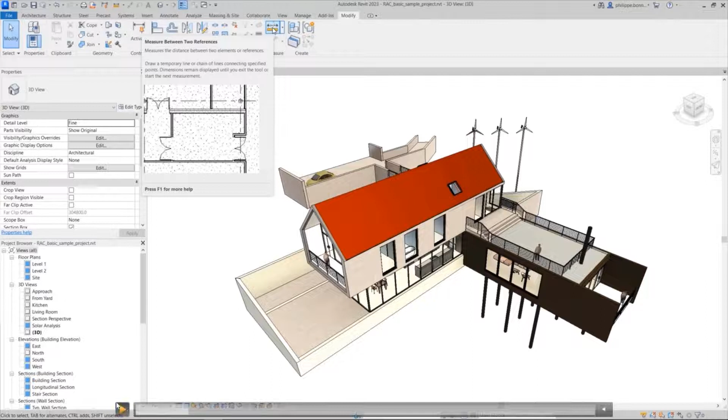All right, so the measure tool, as you guys know, up here in the ribbon. Again, it works in perspective or orthographic projections. And so as we start to zoom in here, you'll see that there's nothing special to do. You don't have to set work planes. You just hover over the canvas using your snaps. They are in metric. We're the last one of 3 countries in the world that still uses imperial. So the demos tonight are in metric.

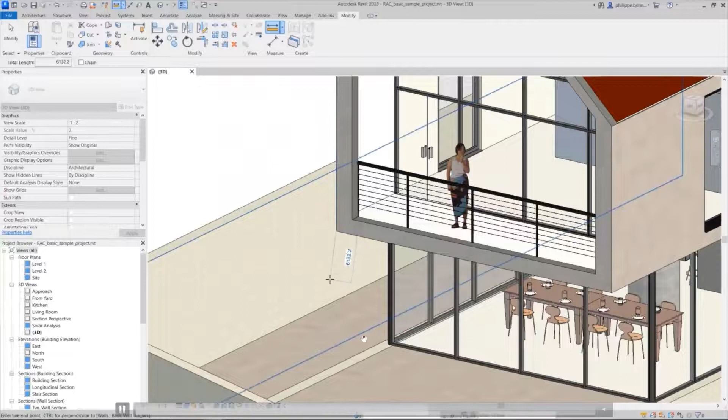And then he's going to hold that control key. So you can see how that's going to automatically snap perpendicular between these 2 walls and give you that. And then also notice as that measure stays there, you can pan, zoom, orbit around it to understand where that is. Now we're going to switch into a pure orthographic projection, just do another measurement, showing maybe that if you want to measure the overall height of this thing, he's going to do a snap override here by right-clicking, grab that perpendicular, which you could also do with control as well, but if you want to make sure it's snap perpendicular, you can do that.

Realize that also over here, the total length will show up in the options bar as well. So as you're doing these measurements, if the little blue text maybe isn't quite clear enough, you can always look up in the options bar and see that. Here they're demonstrating that chain command. So the checkbox for chain, they've done several measurements, and then you get the total chain length of those measurements.

Moving on, next tool is around work planes, and there's a new keyboard shortcut. By default, it's PK for selecting your work plane, so you can select those on the fly. They've also kind of re-engineered the set work plane box, where it's just a pick box now, rather than jumping out into another dialog box where you have to say, I want to pick a plane and go back into it. So it's really just a drop-down menu. You can set your work plane, or you can just say pick a plane. You can also use the PK directly from the keyboard shortcut as well. One more thing, and then we'll take a quick look at that.

So the other thing that's here is that if you have a family object that is a work plane based object, so whether it's a face based or a work plane based object, for instance, this little wine bottle that's sitting here on the table that comes out of the default family library. In the old versions of Revit, if I went and placed that on the table, then got out of that command and had set that to work plane face and went to some other command and came back and needed to place another one of those, it would be defaulted back to place on face, right?

It was always defaulting back. So now the setting actually remembers for that family what you picked last. If it was place on work plane, it will always stay on place on work plane and allow you to be much quicker about that. So let's take a quick look at these couple things as well.

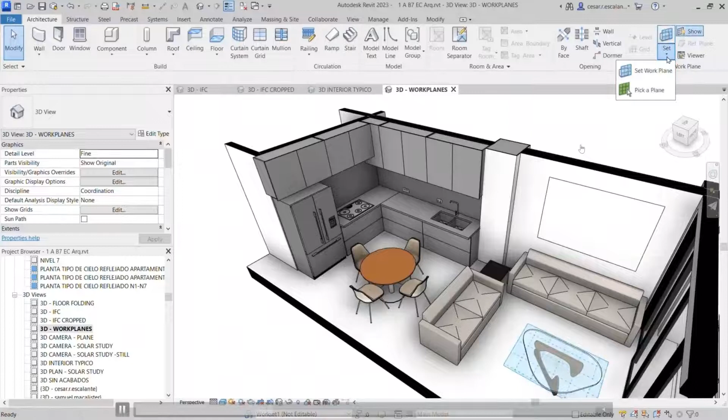So basically, you see that work plane, show work plane is on that tabletop. There's that family for the bottle of wine. There's your new dialog, or not even dialog box, but your quick pick for that, where you can just go set work plane, use that keyboard shortcut PK, which you can also modify. If you don't like PK, you can make it whatever you like. But if you look down at your keyboard right now, they're actually really close together, so it's pretty cool. You can do that on the fly during a command.

So what they're showing here is that the show command is turned on as well. And then CAD file positioning is part of this tool as well. So the ability now, as you're placing CAD files, you can actually pick a plane or a named reference system that those things are sitting on when you actually link them in. So we're going to go in here. In this case, we're going to grab a 3DM file from Rhino, and then you get the place at level drop-down list. Again, this works for DWG, Rhino files, OBJ files, really everything else, and you can actually tell what plane that object is going to be associated with.

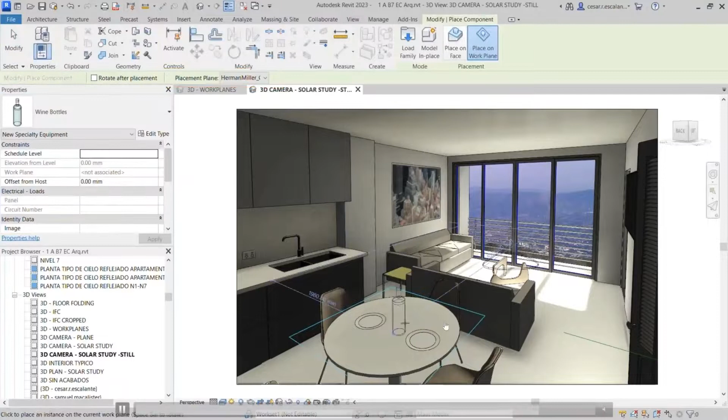This last part of this video is where it actually shows that if you place it once, it's actually saving that setting for you, so you're not having to go always back to the ribbon and double check where your work plane is being adjusted to. You see over here in the options bar, placement plane is actually right now on this Herman Miller table. Next time you go back there, it'll be defaulted back to that exact same work plane without you having to reset it all over again.

Okay, all right, moving on. Well, thought I was moving on. There we go.

This is actually a really big one. I know a lot of you guys work with materials. I think probably the majority of the people on the call, I don't see the list in front of me right now, but maybe a quick poll of the audience, or maybe Jay or Shobit, if you guys know, majority of people probably more architectural focused on the call tonight, or we have some engineering types as well? We got both. We got a decent mix. All right, good. Well, for the engineer types that don't render, skip this one, go do something for a second while we talk about materials. Even for the structural and other folks, materials are actually quite important. So please don't skip over. Nope. All right, we won't skip over it.

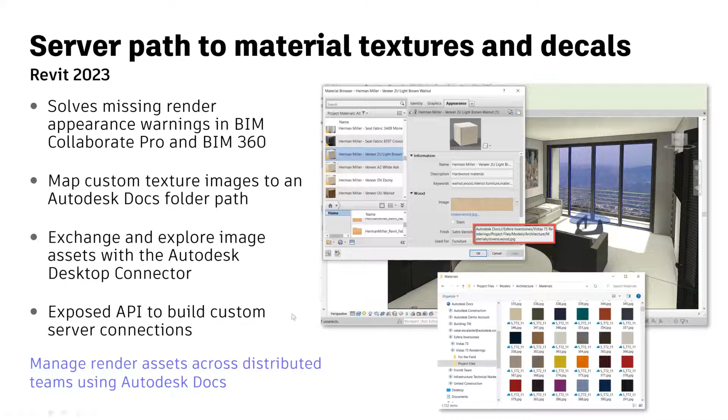So you can actually expose server connections. So if you'd rather have your images, your files on, let's just say Dropbox or some other external to Autodesk solution, you can do that as well now through the API. So it's really going to help you guys when you're doing those renderings through the cloud, that if a material is made and that texture, that JPEG is shared in that cloud site, anybody else that hits render is going to get the exact same results because they're going to be assured that they're using the same materiality for that texture. And I pretty much just said all of that, so I'm going to skip the video in this particular case.

There's a question in the chat real quick, something about being problematic. Can the asset duplicates be removed? Will this make the file size really large over time? Yeah, I kind of answered it a little bit. It's just a new functionality. If you really think that the material assets are bloating the file, there's some other major technological issues going on, because those material assets, even if we duplicated 100 materials, it's not that big of a strain. No, not at all, Jay. I totally agree with you. The JPEGs themselves are actually pretty tiny.

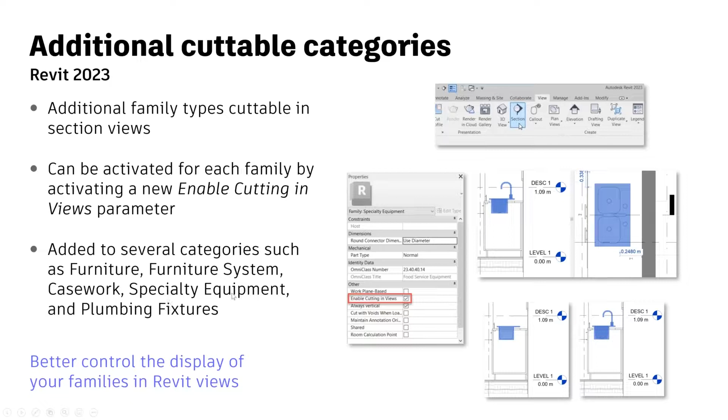Now you can actually go into the family itself, go into the properties and say enable cutting in views. Right here is a little checkbox. So you can check that box off, and then every time you have this particular family cut in a view, it'll actually show that way. And again, it applies to specialty equipment, plumbing fixtures, furniture, and furniture systems. So I think a welcome addition there as well.

There's another video, again, guys, just for time's sake tonight and the fact that the audio is not working well, if I feel like I've explained it pretty well, I'm going to go ahead and skip over the video.

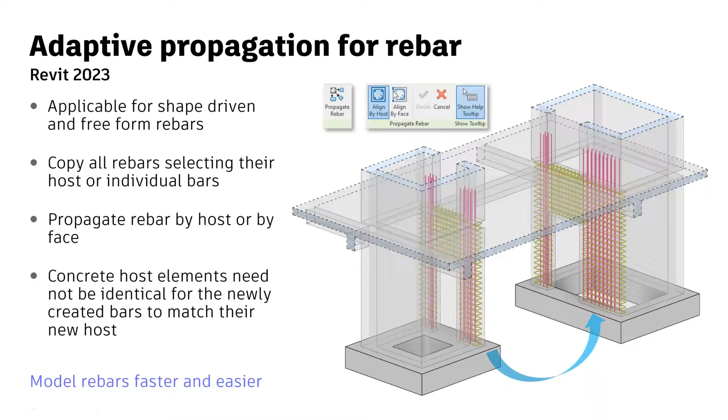It's basically shape driven, or propagation driven rebar, meaning I would create a rebar set for a particular wall. In this case it's got a couple of columns and a header, a door opening down here, and an opening above. Now if I want that similar rebar in another similar wall, it doesn't even have to be the same - maybe one side is a little wider, or the header is a little different above the door. The rebar will actually propagate over, use some intelligence and figure it out. It basically duplicates it over and adds the necessary bars it needs to make it work out.

Now there's a video for this. I'm not as good at the structural side of things, but let me try to voice over this. You can see here that you can simply pick a set of rebar that's already been detailed out, then say I want to pick propagate rebar, pick on all the other columns, and bam - they all basically have all the rebar installed inside of them.

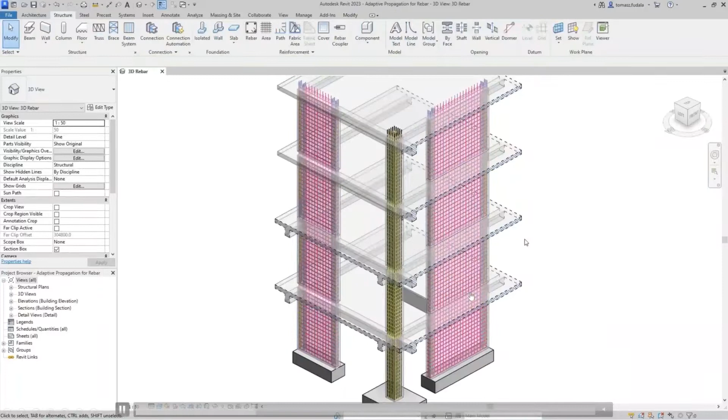They were doing single picks there. They also did a window select and grabbed all of the columns of that type in the model at once. Now they're doing it for walls, and you can see just how quickly a rebar detailer might be able to go in and do 3D versions of rebar in a model like this.

Here's an example where it's a little different - we're going to align that to the host. You can see the doorways and walls are actually a bit different here, but again it figured it out. It expanded out the additional rebar it needed to fill in that space, depending on the set of rules helping define that rebar assembly.

We're also able to do it for just select pieces of rebar - it doesn't have to be the full cage. Right now they're just grabbing some of the outside, looks like rings of that.

Here's maybe an architectural example - if an architect wants a little bit of detailing going on, a concrete stair, adding some rebar to that concrete stair, being able to grab a shape and quickly propagate it up and down the set of stairs. It doesn't have to be another column or another wall - that one showed just in the same stairway.

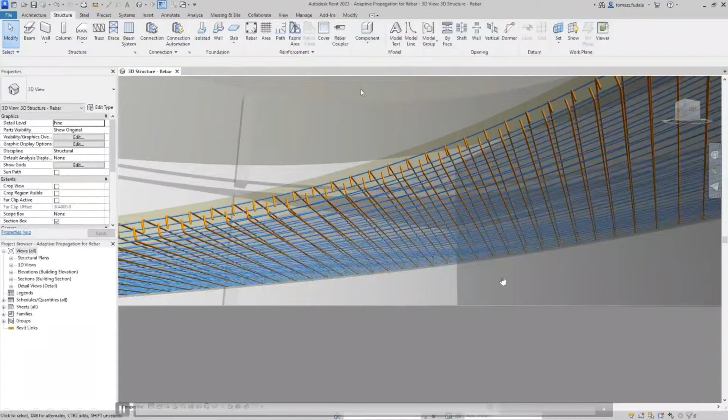And it's not just orthogonal stuff. Here's an example propagating rebar in a parking garage ramp, which is curved and twisted at the same time. We grab that set, then pick on the top parking ramp above, and it takes that exact same rebar layout and propagates it up to the top set as well.

Pick there, select that destination host, and bam - all your rebar is done.

Right here, and at the right side, it looks like. Yeah, I don't know, I'm not sure who did this one or if that's just how it extends. It looks like there's a little shadow of some additional concrete over here. I don't know, Jay, it might - I'm not sure exactly what happened right here in this corner.

But let's get back to Revit itself. Revit just had its 20th anniversary as an Autodesk product. So for those that don't know, Revit itself is about 22 years old. But on April 1st, yes, April Fool's Day, 2002, Autodesk finalized the acquisition of Revit Technology Corporation for $133 million, which in today's dollars probably sounds like a bargain.

And the irony of Revit coming out on April 1st, I think, was intentional. Just saying. Probably, because remember, a lot of us thought, like, no way, it's got to be an April Fool's joke. It can't really be happening.

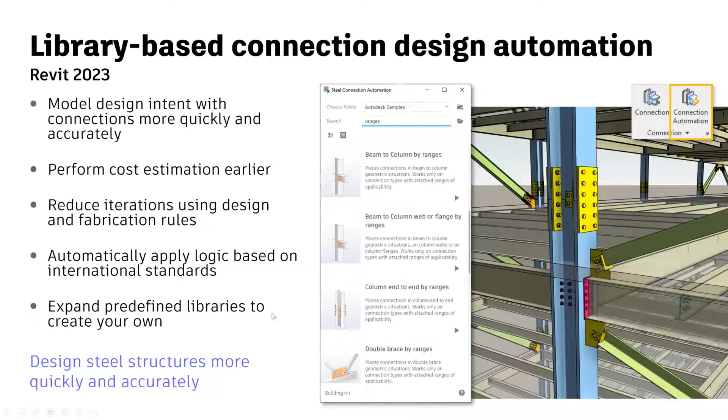You've got some angle connections over here, and a spot where a steel joist is intersecting this column. And there's some of our nuts and bolts. I can't zoom in because it's a PowerPoint slide, but I'm really hoping those threads aren't modeled on those bolts as well, but probably not. There's a video to this, so let's go take a look and see what they had to show.

Pretty cool looking structural steel model. We're gonna eventually, as we pan over the model here, get into where this library component is. I believe they were talking a little bit about the analytical properties of doing this kind of detailing as well, showing some of those analytical stress diagrams right over the Revit model.

So here we go, connection. What was that, Jay? Oh, sorry. No, I'll let the video finish. Okay, I just paused. Go ahead. Well, what was the last thing you just mentioned? Damn it.

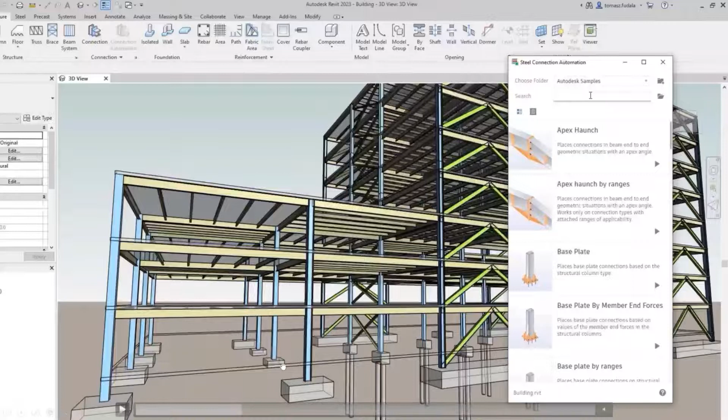The structural analytical properties showing the diagrams, the stress diagrams. I'm guessing you're going to go in a little bit to the analytics for structural. Yes, absolutely. There's big changes for the whole way the analytical models are dealt with in Revit. They rewrote analytical models entirely for structural steel. I shouldn't say steel, for structures in general. All right, let's go on.

So we've launched the, let me go back a little bit. Jay screwed me up. Nothing new. Hang on just a second here. Trying to get back to the actual button.

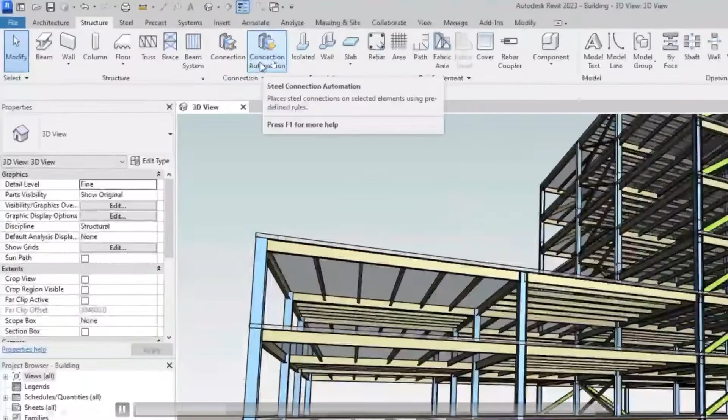Where was it? Okay, you'll see up here at the top when it plays, right here, connection automation, steel connection automation tool. That's going to bring up that player, give you the available kind of types. You can search for those different available types. They're looking for a specific set of ranges, there's a bunch of rules. This is really Dynamo running in the background, so there's a whole bunch of rules that you can define and apply. Then it walks you through this list of any kind of player, and it's going to allow you then to run that. And once it runs, there was a bunch of new steel connections that were automatically applied to all of these different things. So we've got some base plates, anchor bolts, and there was some steel construction or steel details happening up here at the end of these joists as well.

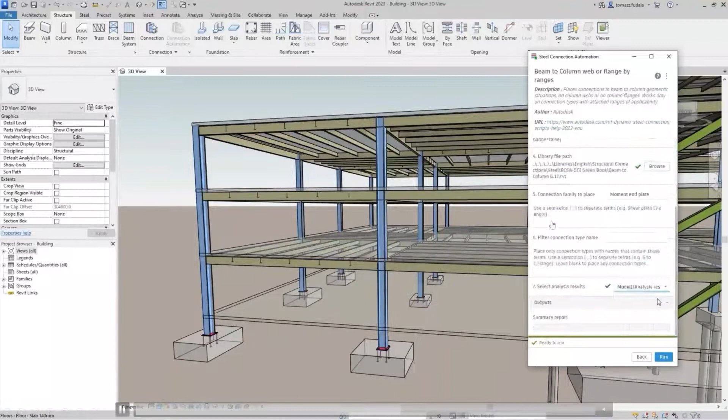Windowing large sections, applying those rules, flipping some of these things from true to false so we can basically define where these connections need to go. Right here on these columns, you might have seen those connection details snap in really quickly. The structural models look really cool to me, the way they get color coded here with the connection details, the steel being different colors to really set it apart. Windowing an entire building, all the steel, let's go apply all this at once.

How customizable are the base plate and connection families themselves? In the video, the narrator talks about these being fully customizable. They come out of the box with an entire set that is kind of industry standard. I'm not a structural engineer, so I don't know if that standard was completely US based or if some international standard was applied. But it does say these are basically a base case that can all be modified to suit your own needs. Hopefully that means very customizable, but I'd love for one of the structural people on the call to jump in and let us know really how customizable they are.

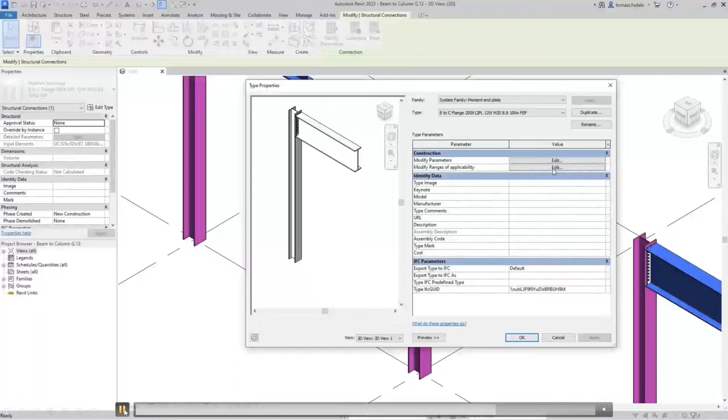Talking about the library itself, here's a bunch of the parameters you can actually go in and change. Ranges of applicability, that's tough to say, but you can change all of these things. You can change all the shape parameter definitions, end forces. There's a bunch of stuff that looks customizable in this as well.

And obviously just doing a quick little fly through. Let's move on, you guys get the point on that one.

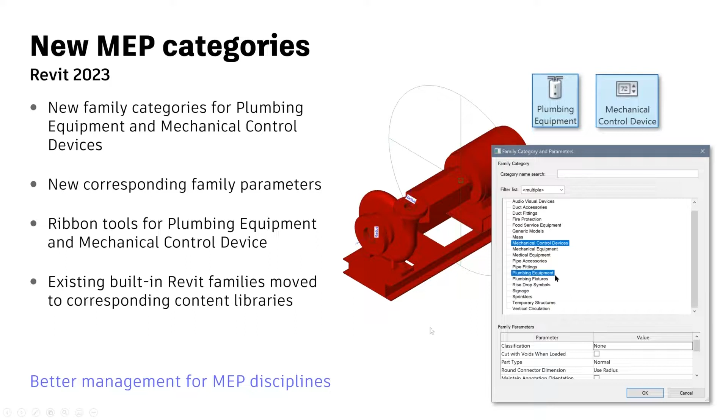MEP stuff, there's a bunch of new MEP stuff this year as well. There's a couple new MEP categories: plumbing equipment is now a category, and mechanical control devices is a category. What does that do? It gives us visibility graphics over those things, gives them their own category, allows us to add them to view filters and view templates, and define them better so they're not just all specialty equipment or generic models anymore. There's a new corresponding family of parameters that goes along with these, ribbon tools for all of these as well, and existing built-in Revit families have been moved to the correct library. So if it's a pump, it's now in plumbing equipment, etc.

Moving on, a tool for everybody. It's an architectural example being shown on screen, but in the past, 22 and earlier, if you had a shared nested family, for instance a table, which is really two families in one, a table family with a chair nested into it and arrayed around the table, and if you selected it in Canvas in a project, the temporary dimensions did not pick up. You could go up to the options bar and say activate dimensions, and sometimes they showed, sometimes they didn't. We basically did away with that, removing activate dimensions from the options bar. Now when you have a shared nested family and pick on it in Canvas, the dimensions are going to pop up, so you can move that nested family, the table and chair, around in its entirety as a group.

Room performance, right? Rooms are one of those things that can degrade performance, because a lot of you guys have giant projects like what's being shown here, maybe hospitality, maybe dorms, something like that, tons and tons of rooms. Those rooms are analytical in property, they can define not only space but also volume. So in this new release we've skipped the regeneration and calculation for redundant rooms, and that helps when you reload and unload links, making it about 20% faster. You're going to see noticeable improvement where you have area and volume computations enabled for your rooms. Again, one of those little features that's all around performance of Revit.

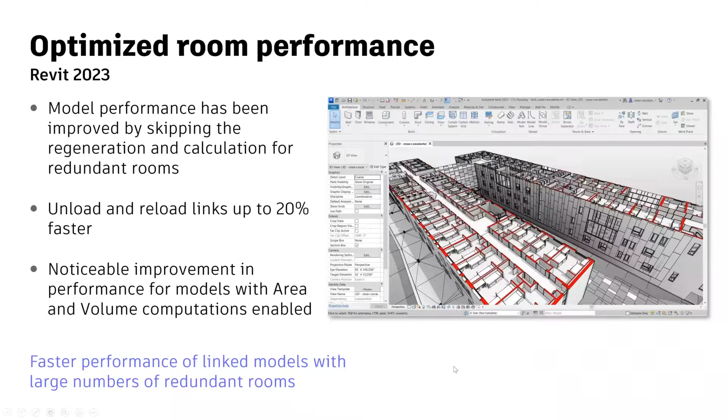Hey Scott, does that mean we can now run wild with calculating volumes? I don't know, I don't have enough experience. Run wild, I don't know, Jay, try it, let's see what you come up with. Yeah, I mean they say the performance is a 20% improvement, so I think that's going to be up to you guys. You're going to have to go in and turn area and volume calculations on in a large selection of rooms and see what it's doing for your performance. I'm not sure if I can actually put a metric or a number on that one.

Has anybody ever been in a situation like this where you need to window select an entire model that's been work shared, and you get 50 million borrowing icons for work shared elements? Or you select a gigantic curtain wall and all of the pins, because all the curtain wall panels are pinned, popped up, and then you can't actually get to the geometry that you need.

So now in the worksets dialog box, the one that pops up from the bottom of the screen, there's a new checkbox that says show work sharing, make editable controls or not. If it's checked, it's going to show these things. If unchecked, it won't show them any longer. It doesn't mean you can't just select the item, right click and say make editable, or there's other means of making something editable rather than clicking on one of these little icons.

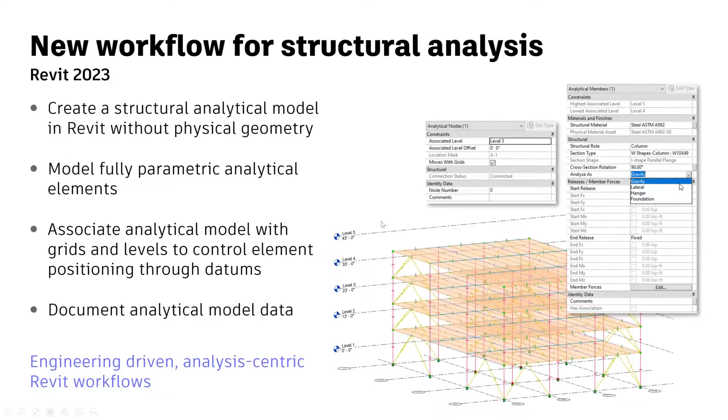One more slide after this one, and then a quick video that I'll try to do a voiceover for. There's some new tools. There's an analytical member and panel you'll see in the ribbon. You can use existing physical geometry as context to snap to, and we'll show that in this video. Control changes independently, so you can take the analytical and move it around, like in this V-shaped concrete footing system. If you didn't want that analytical line there, you could move it wherever you needed. So a lot more flexibility on the structural side.

This is kind of cool too: create multiple analytical models for a single physical representation. Maybe you're testing some things out. You want to run one simulation with a diagram that looks like this, leave the physical geometry in place, and create another diagram for a quick test run, because maybe it's more efficient to analyze it that way, or to have it constructed that way instead.

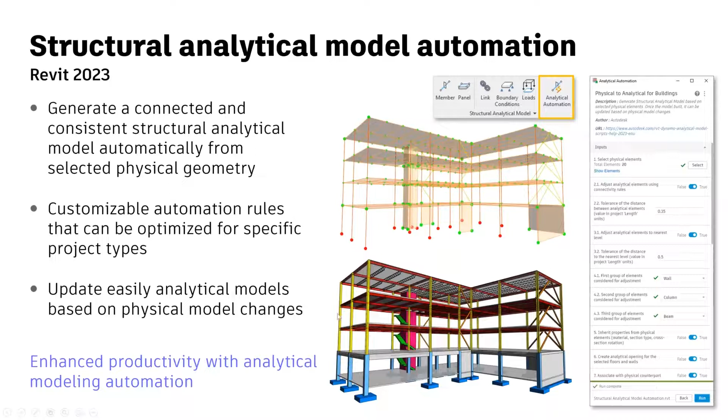Okay, let's take a look at this, and I'll do my best as an architect to talk some structural to you guys. Let's get rid of the volume. All right, here's again some of those analytical models showing some of the stress diagrams. And in a second, they're going to get into this new decoupled analytical model.

So they're going to take physical context. They're going to take structural members that are already there. This is just kind of a quick show of the analytical model compared to the geometry itself. It's not just for orthogonal stuff. It can be for complex arched trusses like this.

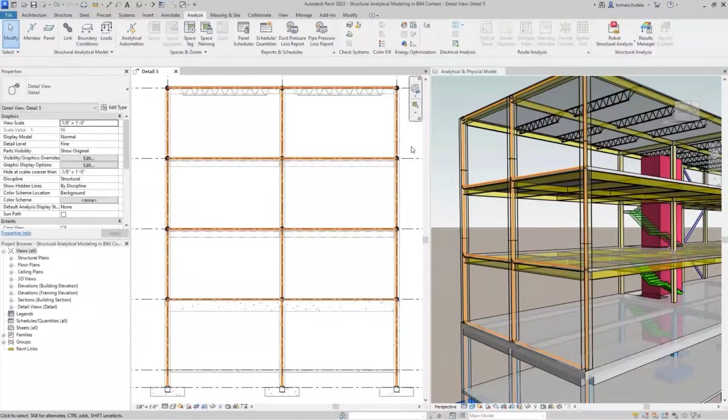Here's the case where we're going to look at a couple of columns. We're going to go in and grab a new tool for start and endpoint definition of this particular analytical system. Connect those dots, and you can see both in 2D, the elevation or the section there, and in 3D all at the same time. It's snapping that geometry to that physical geometry.

Now in this case, here's that kind of different concrete condition for the way that this footer is set up. You'll see that we can turn on 3D snapping, define some parameters over here, define the actual type of section that we're defining this analytical model for. And now you can see that it snaps from the bottom of those round columns to the very bottom of that V, but it doesn't perfectly align with the V itself, because that's how the analytical system would be defined for this particular model.

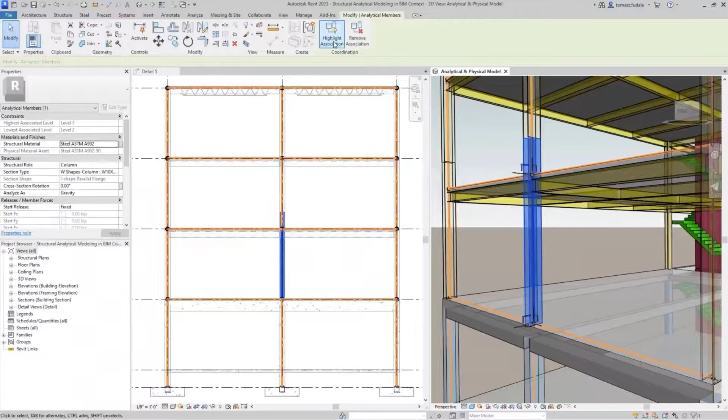And this is just showing you some of the results out of Robot Structural Analysis and a results manager when you get those quote unquote rainbow diagrams out of that as well. And then you can take these things and you can adjust them. So highlight the association between them. Once you make an association between an analytical model and a physical piece of geometry, you can see them tied together at the same time.

And this is some of the automation that says, I want to just go ahead and select a bunch of stuff. I have a model that's complete with all of my steel already that has no analytical model. Run that player script, change some parameters for some different tolerances and things here. Give it some different outputs. Let's see, we got to switch that. Those are walls, columns, beams, it looks like. We're just going over the different properties that are available in this tool.

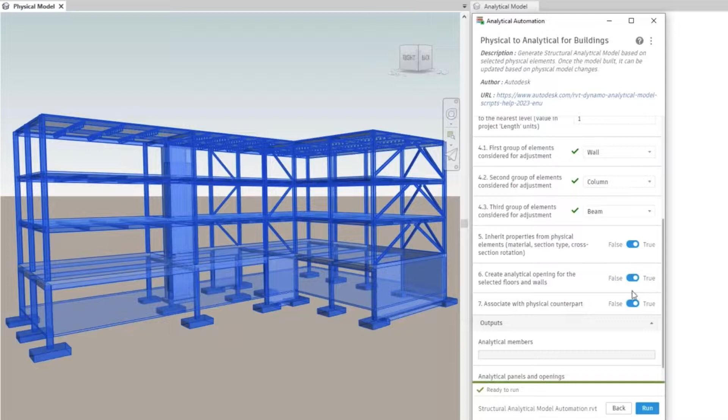And when you're ready, you hit run, and it will apply an analytical model automatically to all those. So you don't have to think about, oh man, I have to do all of this by hand, stick by stick by stick. Nope. You can use these players to get this done very quickly in a very automated fashion. Hit the run button, and in seconds, you're going to end up having the complete stick analytical model of that structural steel model from the left-hand side.

All right. Ooh, this is a long video. What else are they talking about here? Let's see if I can remember from what I learned when I watched these videos before.

Looking at a particular shape up here at the top, I think we're going to make some adjustments to the structural system itself. Highlight that association again so you can tell where the analytical model and the physical model are tied together.

This is that ability to really construct an analytical model entirely on its own without any physical geometry at all. So you can see that we're just in this analytical tool, just drawing the diagrams, so to speak. Structural engineers, am I saying that right? Just drawing the diagrams. There's our floor as a diagram. There's our analytical model. No steel whatsoever, no concrete, strictly analytical.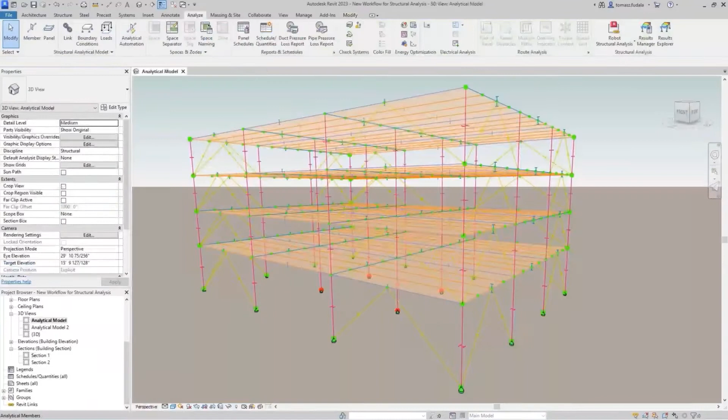We can actually go analyze that now in something like Robot. Make sure it applies first, then go back and add our geometry to it later once it meets the calculations that we need it to. And you saw that it obviously is parametric and adjusts where it needs to, just like you expect anything in Revit. Doesn't apply just to steel and concrete in normal patterns.

Here's an example of actually doing some analytics for a concrete stair, a much more complex catenary curved arch cable stay, or that truss diagram that we saw a little bit earlier in this video.

All right. Yeah, Jay says the Tekla-ing of Revit. Yeah, I think that's probably a good way to describe it. We'd be foolish to think that Autodesk doesn't look at our competition and see what they're doing right and what they're doing wrong, and try to bring some of those things to our own software as well. So hopefully the structural engineers are happy with that.

What do you guys think? Anybody have any reaction from the structural side? Somebody says, yeah, I can't wait. I think that was in reaction to that.

Sal, can you unmute if you're here?

No? All right. Well, it's all right. We'll move on. If they want to speak up later, perfect. I don't know. All right.

I'm doing some structural projects. I'm pretty gassed about it. Yeah, so look, Jay, what do you think? Because I'm not structural, so what do you think? Does it look pretty cool? Well, I think. Oh, there we go. Now I can unmute. There you go. In my experience, yeah, it's at least a time where engineers can start really using Revit for some sort of analysis, where in the past, my experience was it was a joke.

What do you say, Sal? Yeah. For the longest, our engineers have avoided any type of analytical portion of Revit just because of the functionality. But this seems to be promising. I'll definitely be pitching it to our engineers so that they can start probably benefiting from it. Awesome. Glad to hear it looks promising for sure. Yeah, eager to see you guys dive into this, and then maybe at a future LARUG, maybe you guys could pop in and tell us what you think of some of the new structural stuff.

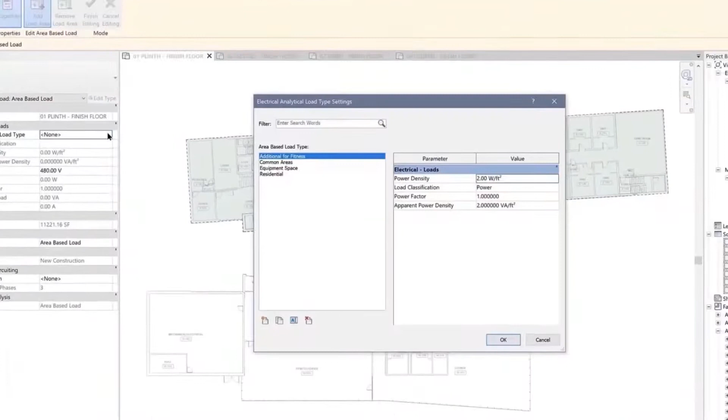Then they're going to look at that thing as an entire area, and then they're going to realize that, no, we need to break that up into a couple different load areas. So they're going to go in and say that this is a dormitory building, so this is a residential style load analysis. And then we're going to, in a moment here, grab some new sketch lines. So we're going to edit that load again. And you notice they're just going to draw these lines completely across the model. And that's just going to divide this thing now into 3 different zones.

So you've got the kind of living space of the dorm buildings. You can see there in the middle. You've got the stair towers and the bathrooms and stuff like that at the ends. So now when they go and pick on these, now we've got 3 different load areas. And so there's our residential. And they'll probably change this. This is now just common area there on the end.

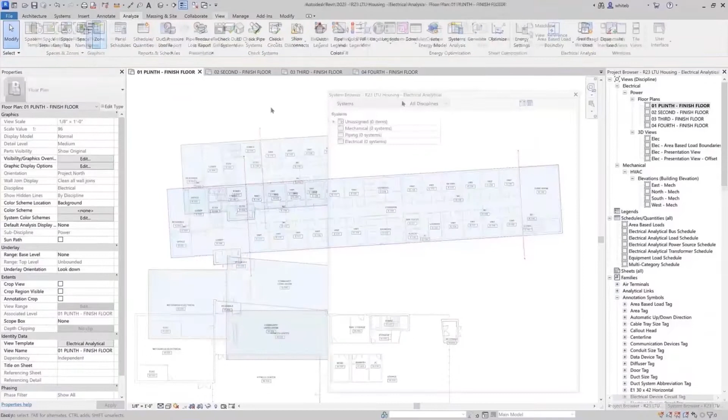And I don't know what they do on the other end, but maybe they leave that one alone for now. Then we can go into the electrical system browser, start talking about the power generation system, what's going to be used. You get to pick from your list. This is all stuff that you guys are used to already when you pick from these lists.

And then it starts giving you these area-based loads based on that sketch that you provided. So the idea is that it's very conceptual, allows you guys to get a much better sense of what this building is going to need as far as electrical loads, again, without having to place a single component inside of Revit. All right, anybody electrical want to unmute and tell us what you think?

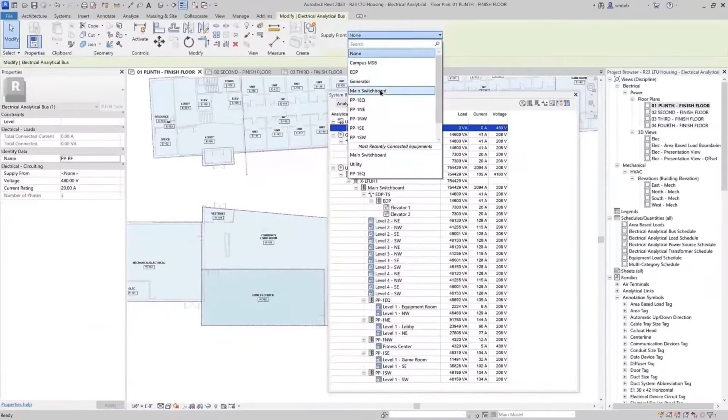No, all right. We'll move on.

Okay, something again, probably more for architects, but maybe there's some solar studies going on the MEP side if you guys are responsible for looking at any kind of lighting analysis, things like that. Solar studies have been in Revit for quite some time, but they were a little bit tougher to find as far as a UI goes.

You went down to the view control bar at the bottom, you went into solar study, there were some settings you could change there that we're going to look at, like changing it from a still image to a single day to a multi-day. These are all controls that were there, but they were kind of spread out through the UI. So what's happened now in Revit 2023 is they've redesigned this entire solar study contextual tab, and it appears in the ribbon when you activate that solar study.

So now you have all of these controls in one spot at your fingertips, and you can change these things on the fly. So obviously we can step forward or backward through the different frames. When you're rendering shadow animations, there's individual frames that get generated, and I can skip forward frame by frame, or I can go keyframe, which is 10 frames at a time. We can change the speed of how all of these things play.

You can play them, play a preview which plays through one time. I can play the shadow studies in a loop. I'll show you that in a video here in just a second. I can change the sunlight intensity, the shadow intensity on the fly. And I can even switch the study type on the fly. So I'm in a still and I want to go to a multi-day and I want to pick the date and time. I can do all of that right from within this one ribbon context.

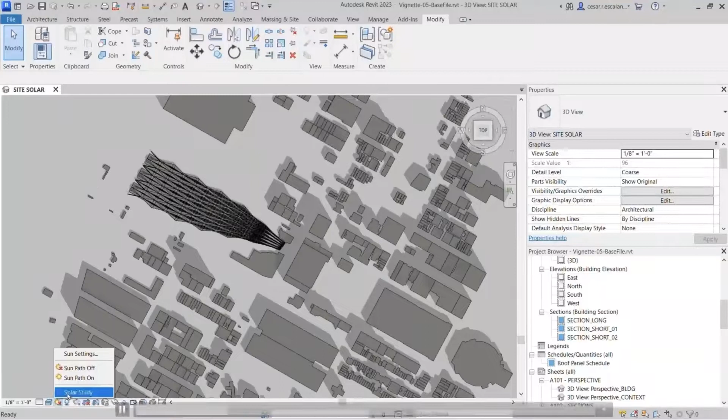So with that, here it is being demonstrated. So jump into that model. There it is, fully rendered out. Nice little guitar in the corner. So just being able to grab shadows and adjust date and time right here in canvas, right? Solar study is in the same spot, but that activates this new ribbon up here. You'll see a solar study tab up here.

And this is where we can then take those shadows and start going through by individual frames. We can go previous, we can skip through keyframes, which again jumps 10 frames at a time. We can play a single preview, we can play it in a loop where it'll just repeat continuously over and over again, as I explained. Again, adjust the speed, sunlight intensity, shadow intensity. You want those shadows a little bit darker, we can darken those up.

It's a little hard to see, but you can see the colors changing down here. It's all kind of gray in this diagram. They should have used more color. Here's one that's got a little bit more geometry to it. They're going to change from a still image here to a single day and play that, so you can kind of see some of those complex shadows moving over the space.

Maybe we want to change it into a fall time solar study, or we want to go in and do a preset and change that azimuth and things there. Again, just adjusting the date and time. Just far easier, in my opinion, to get these things looking the way you want to, or being able to understand what a full animation sequence might look like by being able to analyze those shadows in a much easier way than you could in the past.

All right, let's pause for a second. We're moving on to the next topic. And just to give you guys an idea, I think I'm about an hour in of talking. I'm on slide 49 of 111.

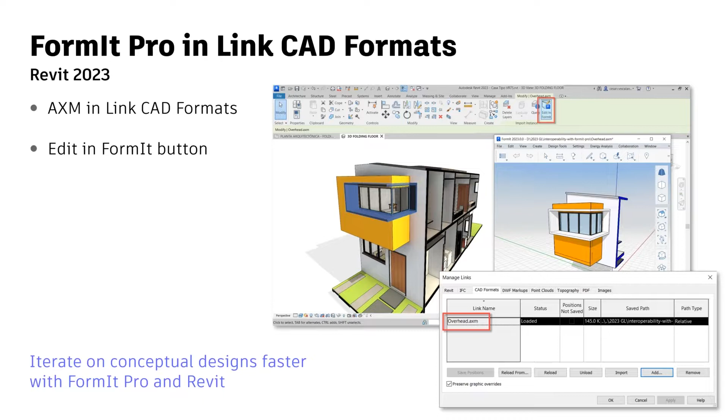So you have to think about that before you start sending stuff over. The next part of this is that when you get into Formit, you'll see that geometry, and another member of the team can then go edit that Formit geometry, basically draw over the top of it, use all of Formit's massing tools, so to speak.

Boolean operations, unioning things together, making subtractions of parts - way easier to do here inside of Formit than it would be in Revit's massing environment. Revit massing, while powerful, wasn't the easiest thing to use. So it's a lot easier to use it here in a sketch-based kind of tool as well.

Then the last part of this is that once you're in Formit, I thought it was out of preview mode. They're saying here in this slide it's still in preview mode, which means it hasn't fully exited beta yet, but I thought it did - I'll have to go back and clarify that.

Okay, so Send to Revit preview mode in Formit is actually a button you check off before you send it back to Revit. You can see what geometry from Formit is actually going to go back to Revit. Sorry, it has nothing to do with being a beta or a preview - I misspoke on that. It's functionality inside of Formit that allows you to say, okay, what am I looking at that's going to get sent back to Revit?

The cool thing that's a big differentiator this year is that it doesn't insert that geometry back into Revit - it actually links it, which is, as you guys all know, far better in any CAD approach. Anything that's CAD oriented - SketchUp, Formit, OBJ files, STL files, DWG - I don't think anybody who really knows how to use Revit ever wants any of that stuff inserted into a Revit file.

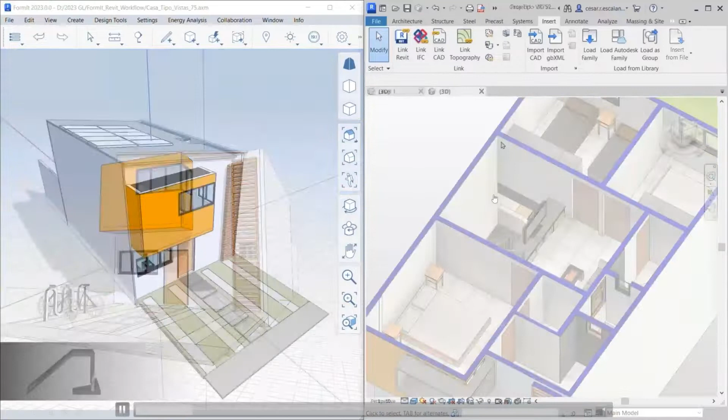We're going to go into the CAD formats itself and manage links in Revit. You'll notice that AXM, which is the Formit file type, is now available there. So you can link in AXM file types directly into Revit, no longer needing to insert them.

What we're going to do now is take some of this geometry here - so there's an actual Formit model in its entirety. You can kind of see it's got this big bounding box around the whole thing. Comes in as an object - you can see it's an import symbol over here.

Now we want to go ahead and edit that stuff in Formit, so we're going to send it back over. This could have been Revit geometry - this one just happened to be Formit geometry. And now we're going to use some of those tools inside of Formit called a 3D sketch. There's another toolbar button inside of Revit that allows us to do this kind of 3D sketch.

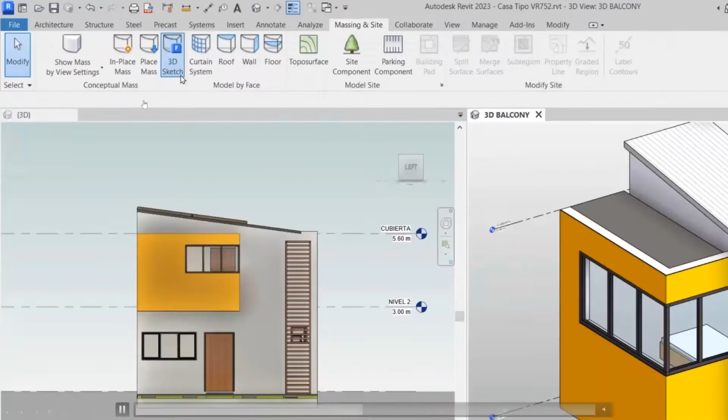This is where you can say launch it with all visible objects, or if I just want to have selected objects. They're going to do a little geometry creation here in the magic of television, quickly rough out a shape, say send back to Revit, and then that FormIt geometry is now applied to the Revit view as a linked file.

The other part of this is that you can actually have this stuff be available not only locally, but part of a cloud file as well. So you can save this geometry to an Autodesk Docs project and open it and link it directly from there in Revit, or open it in FormIt for editing directly from the Docs project. Here's that preview icon that you can check on or off for which objects you actually want to send back to Revit, as part of the layer dialog box inside of FormIt.

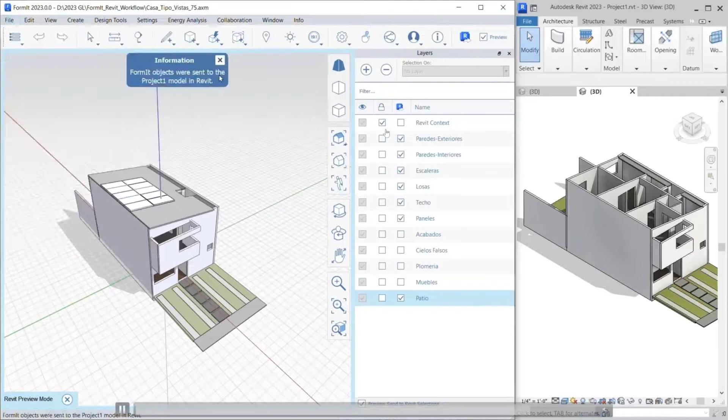So you can say, what do we want to send back? There's a preview mode. And when you send that stuff back over, it will show up as a linked file inside of Revit. And you also notice that was on the FormIt side.

We're going to talk about some other tools for sectioning of things here in just a little bit.

Anyway, Scott? Yeah. Are you going to touch on the coordination models being the most ridiculous thing in the world? Are there any updates to that?

There aren't, not that I know of. I haven't read anything. You're talking about the fact that you can load a Navisworks file as a coordination model into Revit? The words coordination model for that is the most stupid thing in the world. You can't touch it. You can't select any object. All you can do is look at it, and the geometry blows up and becomes really wonky. So as you zoom in, it dances around the screen like nothing before.

So not a tool that I knew got any attention this year, and I don't know where it's going to go or what's going to happen to it at this point.

You have the ear of anybody, either fix it and make it usable, or just take it the hell out. Okay. All right, I'll make sure that I'll send that one up the chain somewhere for sure.

Yeah, it's one of those tools that I don't hear being used a whole heck of a lot in practice. Yeah, well, we use it, and it's a hot mess. It's not good. It would be better.

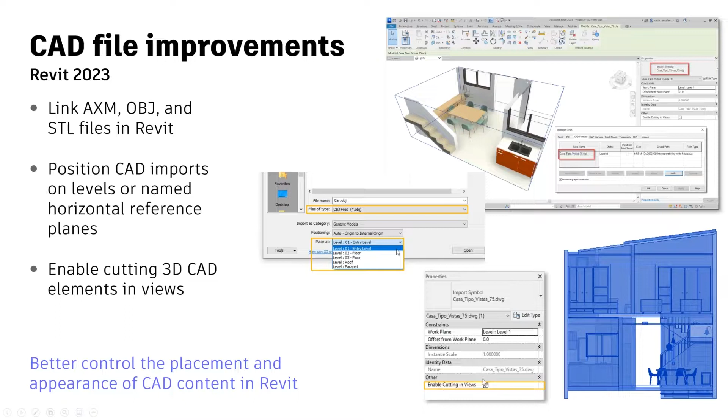It's a property of the symbol itself. So in this case, this little dialog for a DWG has an enable cutting in views checkbox down here at the bottom. And I believe we have a video that shows this as well. Yes, we do. All right, so let's get into this a little bit.

Oops, let me pause or mute the volume on my side. You guys can't even hear it anyway. It just confuses me. So here we go.

We're going to grab that DWG. You'll notice we have a bunch of other stuff in that list now, including Rhino files, 3DM Rhino files, SketchUp, STL. These are all using this direct shape import that I was talking about. So I'm going to pick an OBJ, and it needs to be positioned at the parapet level rather than level 1. So you get to choose where you want that. You can also use named horizontal reference planes. So if it's not on a level, you want to snap it to a plane, drop in a horizontal reference plane, and you can pick that plane from the list as well.

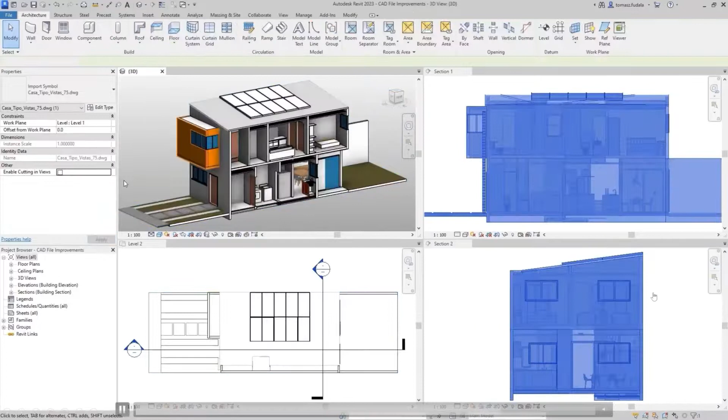So here we are, we're in the import symbol. We're going to turn on enable cutting in views. And now when you drop a section through this, there they go. You saw them just all update. So you're actually getting a live section through geometry that's not native Revit geometry, but it's able to be cut in section here now in this new tool. Pretty cool. This is something I think we have been probably asking for the 22 years that Revit's been available, to have an easy way of bringing in imports and having them be cut.

IFC—we talked more about interoperability. I mentioned this at the top of the slide, that this is the interoperability section. IFC isn't as big here in North America, but it's very much a European thing and an APAC, Asia Pacific region thing. All new, all model elements now have built-in IFC attributes for the different types: IFC predefined types, export as, export to IFC, their GUID for these unique objects when they get to IFC. It just improves the whole process of getting a Revit model out to a cohesive, well-defined IFC model, you know, 1,000,000% from the way it used to be.

So I've actually—oh, go ahead. How about COBie parameters? COBie parameters are not built in automatically, but we do have the Interoperability Toolkit, which has a COBie tool set inside of it, which will then take your families and map COBie properties into those automatically for you. That's a tool that's actually been out there for a little while. Just go to—what's the URL?

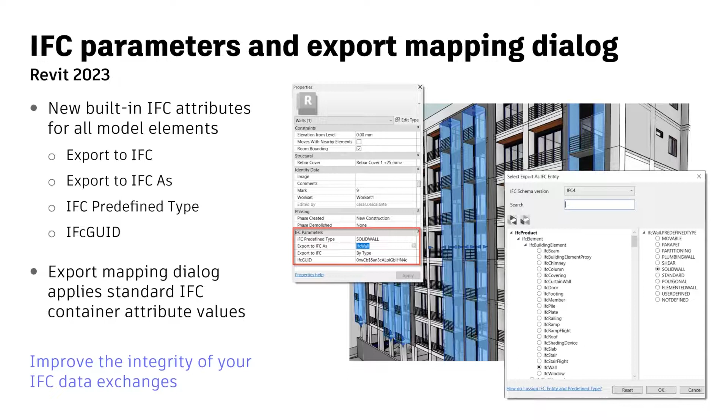You're stealing my thunder, Jay. Just kidding. All right, before we move on from the CAD, Jonathan has a question.

What happens to the CAD file that's hosted to a named reference plane when the named reference plane gets deleted? It stays there, but you'll get a warning that you need to rehost it. You'll have the ability to rehost it to another named reference plane or level at that point. There's the rehost option, but it should stay where it was.

There's a comment from Jonathan about a project that was started in AutoCAD. All the new kids on the block don't know how to use AutoCAD, so they're just drafting in Revit, and there's a lot of banging one's forehead into the wall. He suggests, and this isn't just me, maybe it's time to sunset AutoCAD. I don't know, it's what the entire company was founded on, so I don't know if that will ever happen, but it's still your biggest seller, isn't it?

It is, because we always think of it from an architectural perspective, but AutoCAD is used in so many other industries besides architecture too. You can see how much use there is for computer-based CAD programs because there's all the knockoffs coming out now - BricsCAD and God, I saw one the other day for ArcCAD or something, there's got to be 10 or 15, 20 different AutoCAD knockoff companies that have sprung up recently. So there's definitely still a need for some kind of CAD-based tools out there. Yeah, I guess all I can suggest is wear a crash helmet.

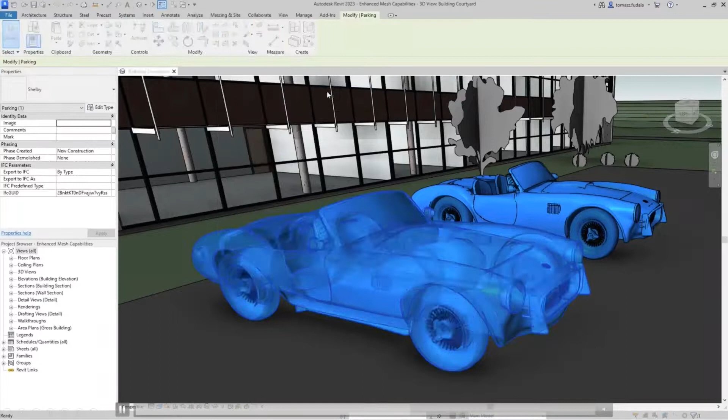And then we're going to override it by element rather than category, and apply a solid fill to that again. Change it to yellow, and then actually that yellow is not quite good enough, so maybe adjust it a little bit, and now we've got a yellow Cobra sitting next to a blue Cobra.

Now, well, let me back up there and try to pause it for a second. Realize that what we're doing is applying the color to the entirety of the object. You're not coloring the tires black and the windshield transparent glass and the rubber seal black. It's one color for the entire mesh at this point, but at least you have a little bit more control over how those mesh-based objects might appear in your Revit files.

Does Autodesk understand that we put materials on things, and that whatever work was put into changing that color is just useless? Yeah, I would probably agree with that. Then again, it doesn't apply a material, so how does that render, Scott? Just a big yellow blob, right? Probably, yeah, I haven't rendered it. I mean, I don't know. We're in a graphic software here. What the fuck are the developers thinking about?

I don't have my video on. I'm shaking my head right along with you. I'm not sure. Is this being recorded? Yeah, that's why I said that. I wanted to make sure this gets in the recording so I can snippet it out and Twitter it over to your boys over there.

Nice. All right. This one I'm curious about. This looks like a really cool tool. I'm anxious to see how you guys as customers and users might start using this. This is all around data, the data that's quote unquote locked in a Revit model, and using some new workflows, basically a thing called Power Automate, to get this information out of a Revit model and then downstream into other applications.

Let's go ahead and take a look at this. This one's probably going to be my worst voiceover because I don't know how to speak about this well yet, but it's talking about the idea that this stuff is mobile and needing to get to data, and data is becoming such a huge part of everything we do. But these data sources are one in a million. So that's where this new tool, data exchange, comes in, which is going to allow us to take data from a Revit model to the cloud and then out to a whole host of other apps, as you saw.

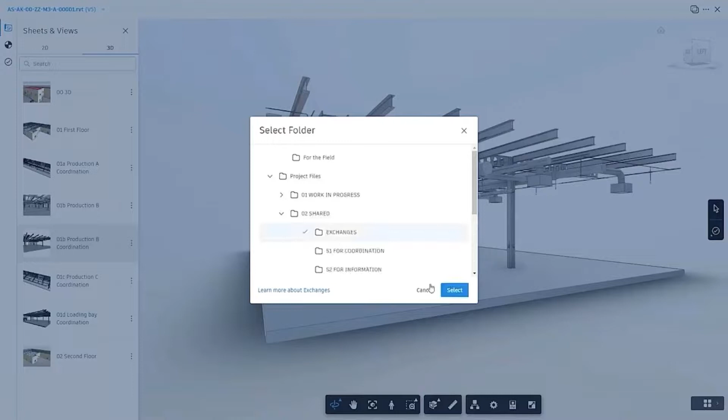So we're going to take this Revit model. First thing we're going to do is publish it out into a BIM 360/ACC project. You've got to make sure you include the 3D model and any sheets that you want to apply. Then from within the ACC or BIM 360 environment, if I go to the little application menu, three dots, you're going to get create exchange. I'm going to pick where this exchange data lives in the project. In this case, they have an exchanges folder. I'm going to give it a name, adhering to a defined naming convention, and we're going to send that over.

Now the Inventor team can go to that same project in Autodesk Construction Cloud, grab that data, and load it directly as an assembly into their Inventor workflow.

Nope, nope, it's still playing. There it goes. I thought I paused for a second.

So here we are in Inventor. We're browsing through the data exchange back to that same project. We can preview it in Canvas here first. Yep, that's the architect's correct model that we want to bring into Inventor as an assembly. You can see all of that shows up.

And now we're going to grab some of our own components, IAM files. These are assembly files from Inventor, laid out on that factory floor amongst the structural steel and other things that were going on there. So a really cool workflow.

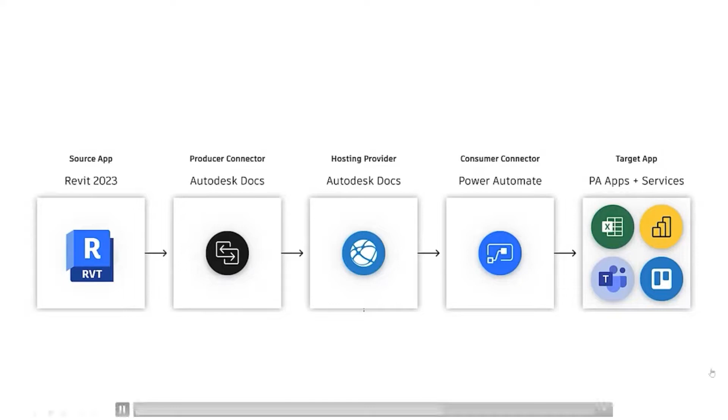This is the one that's the Power Automate into something like BIM 360. I'm sorry, into Power BI. Talking about posting a message directly from data about something. The talk track was about being able to build a quick, easy bill of materials directly from a Revit model through Excel, sending data out to Teams, visualizing a Revit model through Power BI.

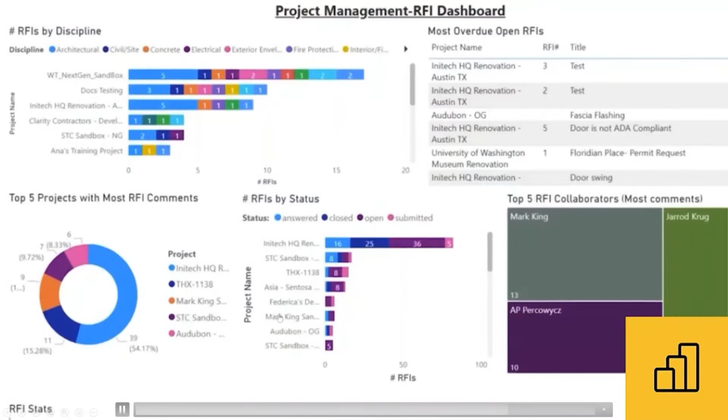Tons and tons of possibilities here about how the data that's embedded in a Revit model might be used downstream by some other application. So anyway, it looks really exciting to me. I'm really curious to see how you guys might dive in and start using this.

All right. Jay earlier asked, are we going to be able to store those parameters in the cloud? Yes. There's a brand new one, still labeled as a tech preview. There's still a little bit more work to be done here, but it's working well as it is now. Realize there is probably at least another point release of Revit, or maybe two, for some of the additional functionality to get built out.

Is it functionality to get built out, or are there issues with it right now? No, it works well right now. It does work really well. There's some additional things that they want to add to it, from my understanding.

Awesome. Okay, so parameter service creates a library of parameters on Autodesk Construction Cloud. Realize that this only works in the Autodesk Construction Cloud environment. This will not apply to older projects that might still reside in BIM 360, unfortunately, but that's where we're moving with the technology.

What's really cool is it's adding parameters from the parameter service anywhere shared parameters are used. You can log into your project in ACC without having to edit a text file, create a new parameter in the project in Autodesk Construction Cloud, and then load it into a project from there.

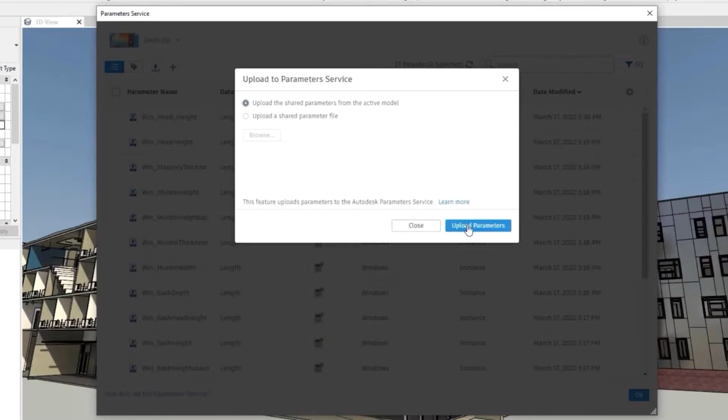Again, sorting, filtering these things from within Revit so I can get to what I need quickly and easily. We know that your shared parameter files get very lengthy. And we're going to even upload new parameters from here, from within Revit. So you can do it from the cloud, you can do it from within Revit. Looks like we're adding 43 new parameters to this cloud parameter service.

Also download a report. That report will tell you whether or not those parameters loaded properly. If you had a malformed parameter in your list, it would not load properly, and it would tell you in that list. A little status icon will show you whether or not they are in a project, whether they've been categorized properly. So in this case, we've got to go in, recategorize that last one as a window-based parameter. We can load that into a project, and then it will be available to be used.

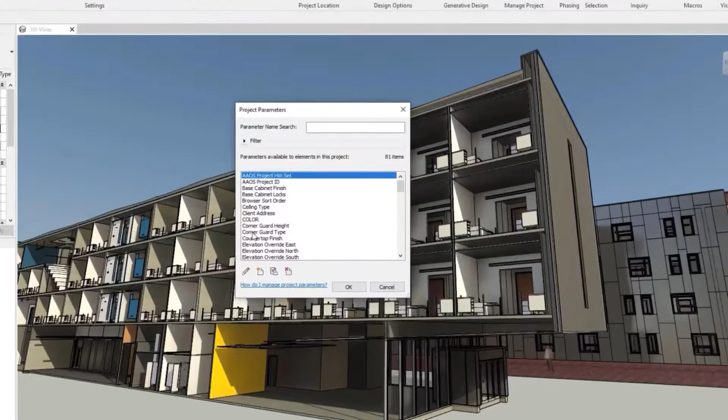So I think we're going to go in here next. We're going to look at a project parameter. There's the new little parameter service button down at the bottom. We're going to pick on that, do some sorting and filtering, nailing down the one that we want. We want to load these into my Revit model as project parameters. We just added them. Click close. Assign them some disciplines, types, etc.

I don't remember exactly what the voiceover was saying at this point. All right, that's about it.

So anyway, I think this is freaking fantastic. I love this idea of a better way of managing parameters, a better way of adding them to a project as a whole, so they can be shared amongst all the different disciplines that might be working on a project. I don't know. What do you think? Jay, what do you think? Well, I think this is a huge update, actually,

and is actually, I think, going to give a lot of ammunition for upgrading to this version on some of the large projects out there where everybody's kind of scared to update because their BIM managers that are literally just AutoCAD people who changed their LinkedIn title are now running the show, and they don't know what the fuck they're talking about. So they're keeping projects back like 3-4 releases in case, you know, upgrade always has issues. It's like, no, in 2019 they did, but no longer do they.

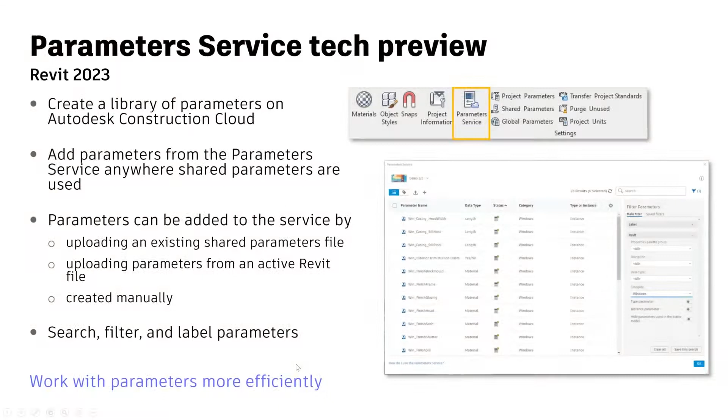There's some reason why it got held up with this release, and I'd expect that since they're mentioning it here, it's coming sooner rather than later. I always hesitate when anything from our group says 'coming soon' because there's no timeline on soon—soon could be 4 years. But in this case, I'd expect, with no prior knowledge, that coming soon probably means a future point release of 23. Again, no guarantees, don't make any buying decisions based on that.

Everybody, Scott promised it's going to be out by next month. Thanks, Jay, it's recorded. Don't clip out that portion and leave out my disclaimer—I threw my own safe harbor statement in there verbally. I don't know how to edit video, so if that happens, I don't know what went on.

Perfect, all right, let me get back to where we were here. Parameters... oh, cloud model updates. So cloud model updates is actually pretty good too. I've seen several bloggers list this as one of their top 5 favorite new features.

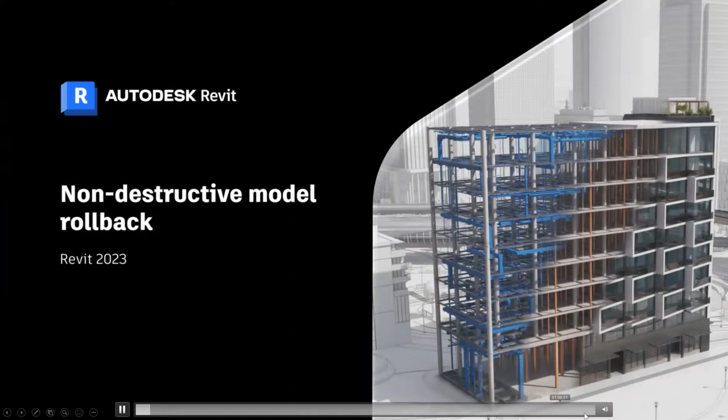And I believe, oh, there is, let's see, there's a quick little video on this. Play, is it playing? Oh, there we go.

So back to the Revit home screen. Come on, guys, pick up the pace here. Under Autodesk Docs, you'll see a project, and if I go over to the little ellipses menu on the right-hand side, you'll see Open and Audit. Relinquish, it is there, Jay. Version History and Relinquish are both on the home screen now.

So if we go to Version History, there's all the different version history. Who did them? I'll pause here briefly. Who did them, comments, and timestamps of all of those things. We can open a file directly from here. We can open one of these past versions from here, or we can restore from there as well.

Now, there's something I've told user groups in the past, and I believe I've told the LARUG this. This comments thing is, in my opinion, a feature that is often skipped, and it's really important, especially if you ever need to roll back.

Everybody in this room has done a Sync with Central at some point and went to that dialog box, and in the dialog box with Sync with Central, it has a comments field there that allows you to type something in. If you ignore it and don't type anything in, this is blank. But if you spend 5 seconds and say, this is what I did, I was working on bathrooms on level 1, I don't know, whatever you happen to be doing between your last Sync with Central and this one, when you get to a dialog box like this, those comments are going to key you in to what was happening at that date and time, rather than just being, I don't know what Mr. White was doing here, or here, from this date to this date to this date.

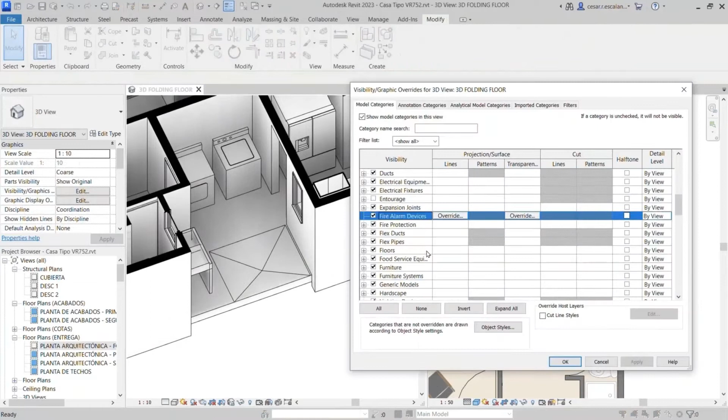So there's our floor and our slab. We can go up to that tool you guys are probably used to, which is to modify the sub elements, modify floors. We're going to add some split lines to that. In this case, we're going to make that rectangular separate piece of the slab as split lines, and then drop a depression in the middle of it, like a shower pan or a drainage area, as the folding lines.

Now, because they are in visibility graphics, we can change the colors, the line types, and the visibility of those things if we want to.

They're not only for straight orthogonal pieces. Here we've got a curving, sloping ramp, a kind of parking situation, and we're going to convert that folding line into a split line first.

So just pick the tool, pick the line, or maybe it was already picked, and now it actually splits that element into two other pieces.

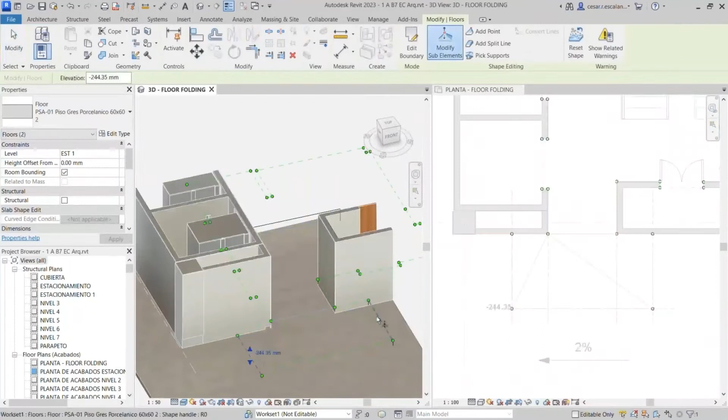Then what are they showing here? We're doing some extra shape editing to do a ramp into that one. I don't know what that last part was all about, it was really the same thing over again. But anyway, so some new tools there.

I'm going to go a bit more clear on a folding line as opposed to a split line. What is the difference? The folding line, if I get back into the video, in this diagram, the folding line is the crease, and the split line is where you would be separating that shape out from the rest. This floor is all one floor.

So the split line is where you're saying, I need this piece to be split out, so to speak. It's not physically making another piece of geometry, but is defining it as a separate piece so that when you drop in this case, they dropped the point right here in the middle of it and dropped it down, then it created folding lines from the edges of this new split out area. So basically, they've defined interior edges with folding lines, and that's the difference between the object's up and downedness.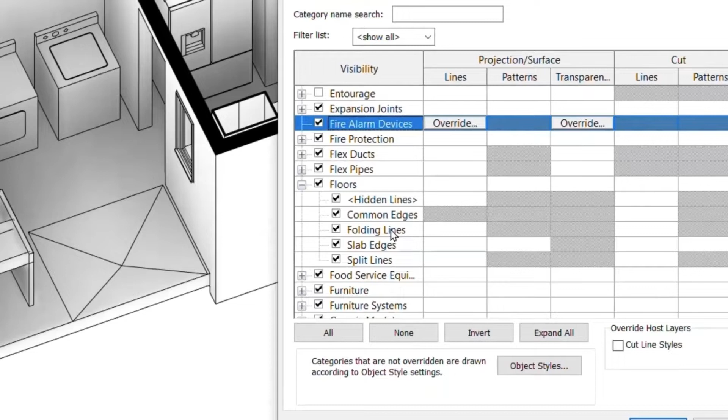Yes, you got it. Oh, got it. Thanks. Sure. All right, conditional formatting for family and type.

So this is the ability in schedules to now apply conditional formatting. I believe in the video it's a little hard to see here, but there are 3 options. There's not all the Boolean operations, but there's whether it's basically true or not true, depending on what parameter, or none at all I think is the other choice, and it allows you to apply color coding to schedules based on those things.

So it's conditional formatting for family type and family and type, so you can make sure through your schedules the ability to graphically display things in a much more user-friendly way. Let's go ahead and take a look at this video.

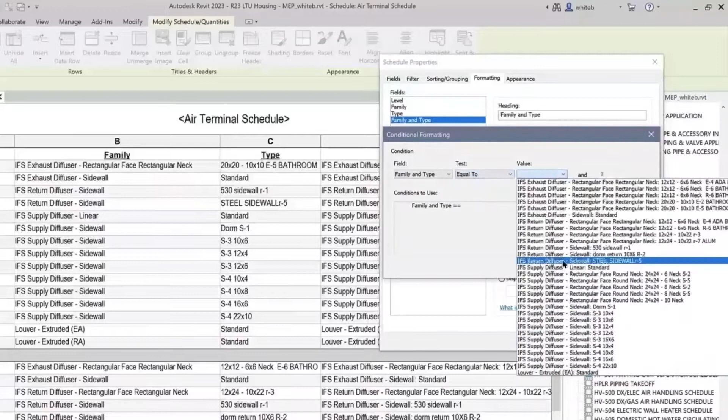And then we're going to do another one for family and type, and set those equal to some family and type from that list of all the stuff loaded in this project, and make those magenta in the schedule. Click OK, and then that color coding applies to those particular things. Pretty straightforward, right?

All right, filtering by sheet in schedules. Oh my gosh, this is one of the ones that, again, I wish I had now 16, 17 years ago before I joined Autodesk.

Just the ability to drop a schedule on a sheet and say, hey, only show the things that are on that particular sheet - this does exactly that. Under the schedule properties tab for filter, down at the bottom, there is a new checkbox that says filter by sheet. When you drop a really long schedule on there, you can turn that on.

And if you start to adjust something like the crop region of that view, it will also then dynamically update. You can also take that same exact schedule and drop it on multiple sheets with filter by sheet turned on, and it will automatically update depending on what sheet it's on.

Obviously, the big schedule view in Revit is not done by sheet. It's kind of the big master schedule, and then when you go to the individual sheet views, you see it filtered for that particular sheet.

Take a quick look - oh, so even though they're on the sheet filtered down, the schedule itself is the master, so you could actually use that to manage the data. Oh, sweet, that's going to cut down all my management schedules. There you go, love it.

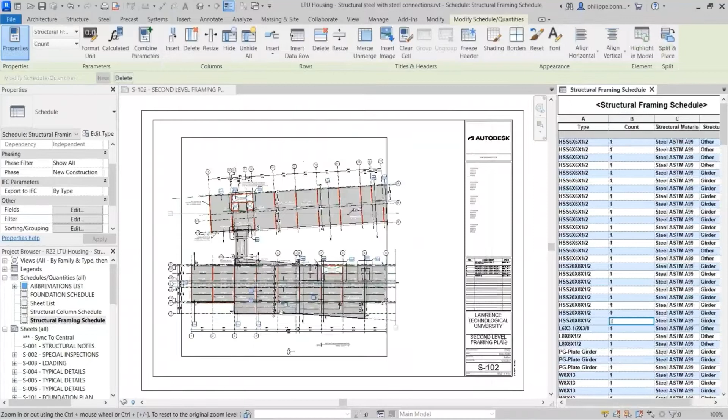We're adding a couple of things here to this structural framing schedule in this particular case. I don't know why, but they decided to do some column adjustments there, maybe just to make sure it was going to fit on the sheet where they wanted to. So drag and drop - this is what you saw prior: holy shit, how am I going to fit that entire schedule on this sheet? There's no way, even splitting it, there's just way too much information there.

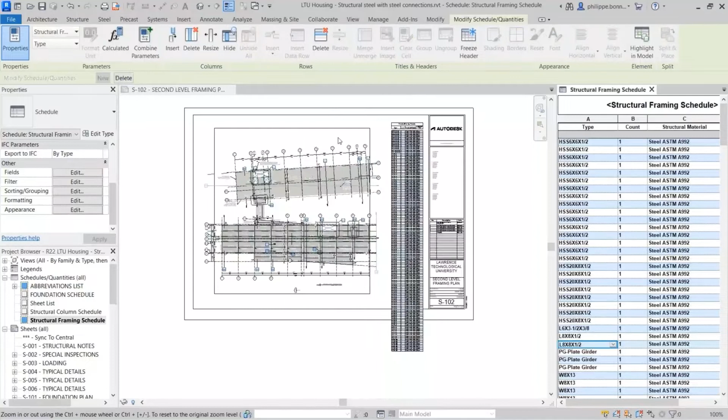So what they're going to do now is go to that schedule itself, into the parameter for schedule properties, go to that filter tab, say filter by sheet, apply that, and you'll see the schedule gets much, much shorter. Oh crap, it's still a little bit too long, so let's just grab that crop region and make this one a little bit shorter. Now that schedule dynamically updates depending on what is actually shown on that particular sheet.

And then we want that on yet another plan. So now we're just going to drag that exact same framing schedule onto another sheet, readjust it, and it's only showing what's on that particular sheet.

There's a comment, if we can clean this one up - regarding the floor slabs or slab editing. Payam is saying it would be great to be able to add, let's say you cut a rectangle and assign the depression, let's say -6 inches or whatever for the entire rectangle, so it makes a depression rather than a faceted sloped slab. Can Revit model an actual shower pan yet or not? Yeah, I know exactly what you mean, that would be great. Just say take that entire split area and drop the whole thing by 6 inches rather than straight dropping a grade point at the middle. Right, yeah, that's a great point. I don't know, let me go back to the team and see if that's something that was considered. I mean, it's only like how every single architect works ever, always.

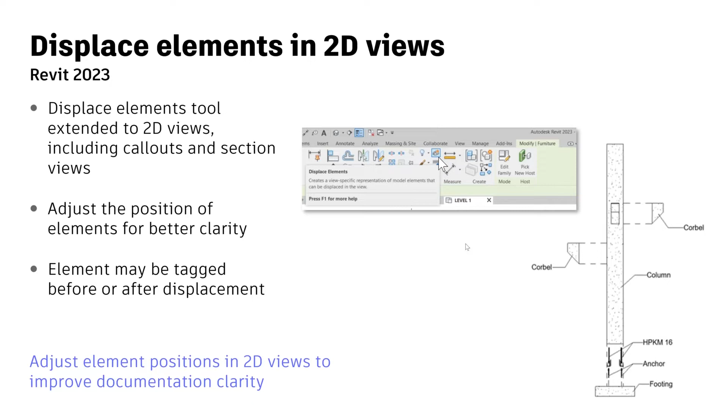So this has been turned on, and the tagging works with displaced elements. In fact, let's just go - there is a video here. Why isn't this going? There it goes, took forever to play. There's a video here that talks about this.

And so, you know, they're showing old school - this is the old one. You just take 3D elements and you displace them and you draw the quick little paths or the little witness lines that pop out of those things.

Let me see if I can skip ahead here. So here's a 2D funny example. I don't know why they picked this example, but they're going to displace a window from a wall.

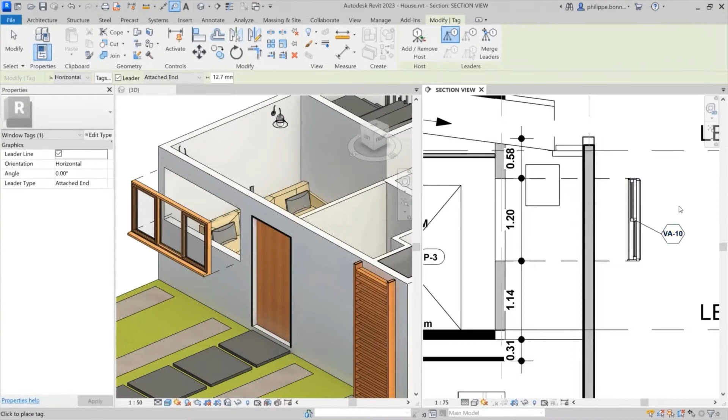The joke last night was this is mess-with-your-coworker time. You just start displacing elements from a wall and have your coworkers go, why the hell is my window out here? If they didn't know about this tool, they may not know what's going on. So this could be April Fool's Day jokes on your coworkers.

And you saw the tagging was there too, so you can tag those elements still, even in displaced mode. You also now have in 3D, tag all displaced elements in 3D views. Tag all was not there before, so now you can do that. You have that category checklist as you have for tag all that says I want to tag all doors, walls, windows. The tags can be applied after displacing or prior to displacing the elements, and the tags will move along with those elements when they are displaced or if their displacement position is changed.

There's a video, but I'm going to skip it. Go ahead. The displacing elements. Yeah. Let's say in a detail, since you're trying to tell us that that's going to be useful for details. Can I pull the sheetrock away from the wall assembly? Yeah, I think you can because it's considered an element. So if you have a wall that's been turned into parts, you should be able to take that part and displace it away from that wall.

So it would have to be turned into parts. It can't just be I cut a section of that wall. I need to show the waterproofing that is invisible, and I can't just move the sheetrock away, whatever 7/16 of an inch, and then just show it. Yeah, it'd have to be parts first, is my understanding, and then that part could be displaced. Unfortunately, but I do think that there's going to be some work there with walls in the future and the way that walls are assembled. So maybe there's something in the future coming up.

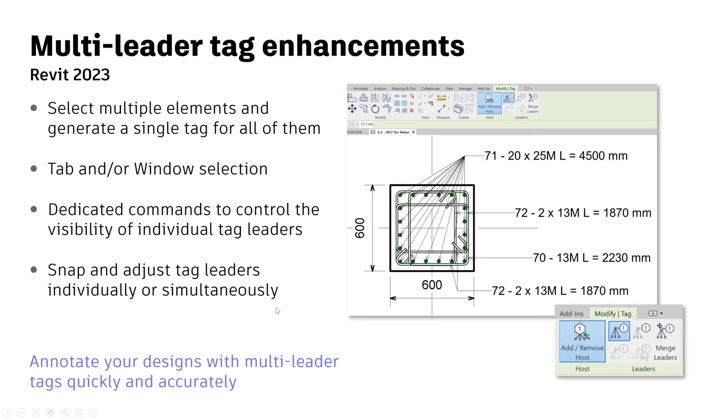And then you have some new tools over here where you can add or remove the host. You can merge the leaders together into one. There's a bunch of other things you can do with this, but it is a much better, quicker way rather than multi-line leader and going pick, pick, pick, right? That was the old way. You could do a multi-leader, but you had to pick every single object. Now you can window the objects and apply a multi-leader and it will grab them all at once. Okay. We'll skip the video on that one for time's sake.

There are a bunch of additional taggable categories that have been opened up in Revit 23. Columns. I didn't know that columns were not taggable in the past. Entourage. I'm not sure why you'd want to tag entourage, but you can now. I guess there might be some data there that you might want to display. Fascias, gutters, roof soffits, handrails, pads, ramps, wall sweeps. All of those things I could see being better to be tagged that you haven't been able to in the past, like roof soffits, gutters, handrails, so you can define a specific tag for a particular handrail, I think is a big one as well.

You also see that you've got model group tags highlighted over here and RVT link tags over here as well. Somebody asked me last night why these tags were all just displayed with a name. It obviously depends on the tag itself. It's up to you guys. There's the out of the box tags for these things, and you can go to the tag family and you can define the parameter that you want to actually show up when you tag these things. Okay.

Contour label direction. Now, Steve Stafford told me last night that the old way that Revit did this was actually a civil convention, which was that labels on contours read downhill to uphill on the direction of the drawing from which you might be walking. So generally in Revit, they many times appear to be upside down, so to speak. So now in Revit 23, based on customer requests, those labels will be all right side up relative to the sheet or to the view now.

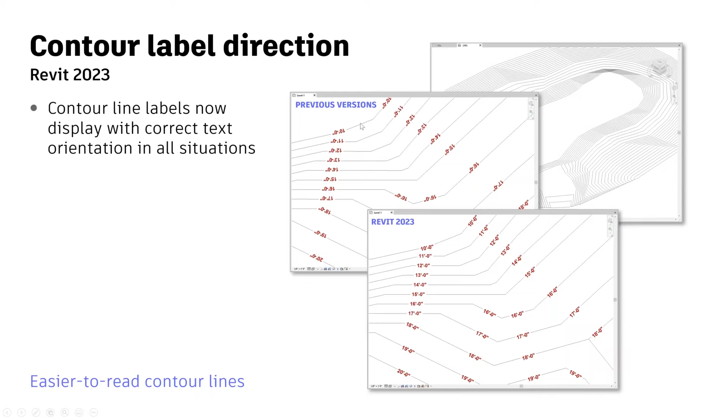So just again, little fix, makes it a lot easier to read. Most of us aren't civil engineers working in Revit, so we really don't need the civil convention. Let's make it more friendly for everybody. All right, getting closer to the end, guys.

This is probably my #1 favorite new tool in Revit 23. Finally, the ability to define a page order for PDF export and your print output, right? So anything you're physically printing out, anything you're sending out to the built-in PDF writer that got included last year inside of Revit 22, you now can actually define the print order and save that set, and it will save.

I can show you this in Revit, but what you end up doing is you go into the print or export to PDF dialog box. You grab the set. You can say how you want these things defined, and then down at the bottom, there's an edit print order button. You can see here that it shows you the defined print order, in this case 1 through 16 at the bottom of this list. You literally just pick the ones you want and you drag and drop them into the proper order and they will renumber.

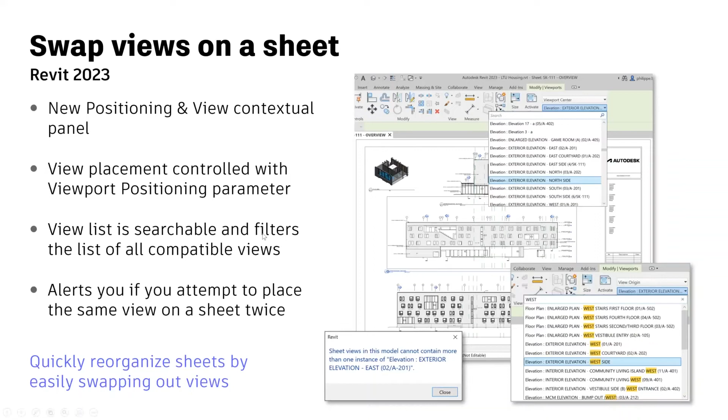So anyway, I think that'll make it a lot easier. You can now literally duplicate a sheet, go to the next sheet, take the view that was already there as a floor plan and swap it out with another floor plan to get it positioned exactly where the last one was. Should make it a lot easier for doing sheet setup for you as well. All right, and there's the video. I'm going to skip that one.

View filter enhancements. You now have wall sweeps.

By default, these elements inherit their graphical appearance from the walls to which they are hosted. In Revit 23, there's a new subcategory for wall sweeps. You can see it over here and over here. It's basically been added to view filters, making it possible to control the visibility and graphical appearance of wall sweeps independently from their hosts. So you can create a new view filter that overrides the line work display for the wall sweep subcategory. And once that filter has been defined and added, the wall sweeps are automatically colorized as specified.

I asked Harlan behind the scenes, I go, what about wall reveals? Why just sweeps and not reveals? And he goes, it's actually a lot trickier of a problem because a wall reveal is really a negative in the host, and the negative is obviously not displayed. So he said to be able to do that, they've got to do something else,

because really what you're displaying is the host boundary. My example for him was, in a lot of stucco kind of detailing, you do half-inch reveals everywhere. And in my old experience, when you did reveals in a wall, they inherited the cut line style of the wall itself, and in elevation looked horrible, because then you got all these really thick, muddy looking lines for all of the reveals, rather than maybe a nice thin profile showed for that wall reveal. But so this applies to sweeps.

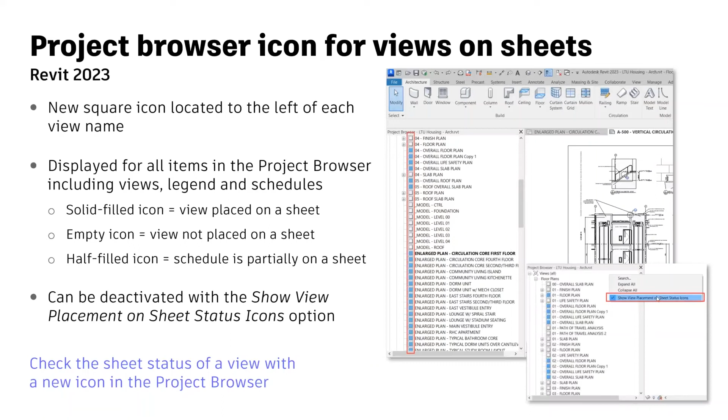Gotcha. Okay. All right. Whew. Throat's getting scratchy.

I'm going to need another adult beverage.

A few other things: edit label dialogue improvements have happened, and common properties for model groups and RVT links. I mentioned this earlier, but if you open a family today, there's a generic set of parameters for every family - URL and a whole bunch of other stuff listed there. Well, they've extended that common property set, which used to be reserved just for families, out to model groups and RVT links now as well.

More performance improvements in printing, publishing, and export functions. For those interested in APIs, there are new view and sheet APIs - you can use things like Dynamo to enhance the creation of sheets for yourselves.

I don't think I hit upon all of the stuff tonight. In fact, earlier I skipped a few slides that I thought weren't quite as interesting. Let's take a look at the entire list now of things that, at least from a marketing standpoint, they listed. Again, I did not mention all of these things tonight.

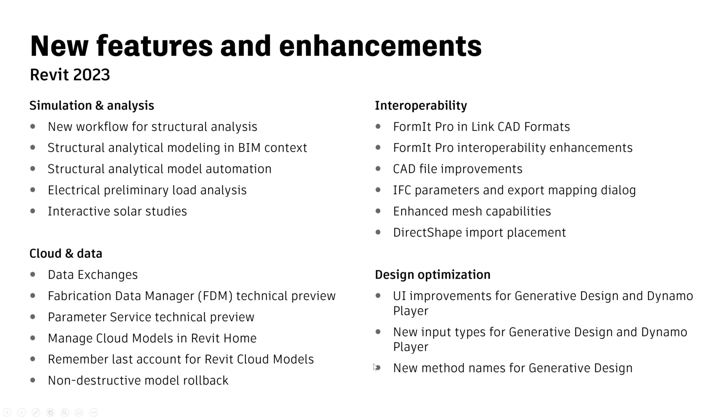I've been reading some of the different blogs out there - Dan Stine's got a great one, he wrote an article for AEC Bytes, and actually mentions features above and beyond this list. So there are lots of little things out there. A lot of people participate in the Revit preview, the beta program, and they pick up on little nuggets along the way that may not make it into the enhancement list here. But for me, it feels like a pretty good, solid release.

Last year was, I think, a fantastic release - the development teams and Autodesk in general reacted to the open letter I'm sure you all heard about. Last year was a huge push to do a lot of things that really needed to be done. This year, I think it was a lot of keeping up with the Joneses, and the Joneses were ourselves - there was a big push to try to do as much as we did in the Revit 2022 release. So anyway, to me it feels like a good release.

Let's open it up to questions, see what you guys think, and if you feel the same way from what you've seen tonight.